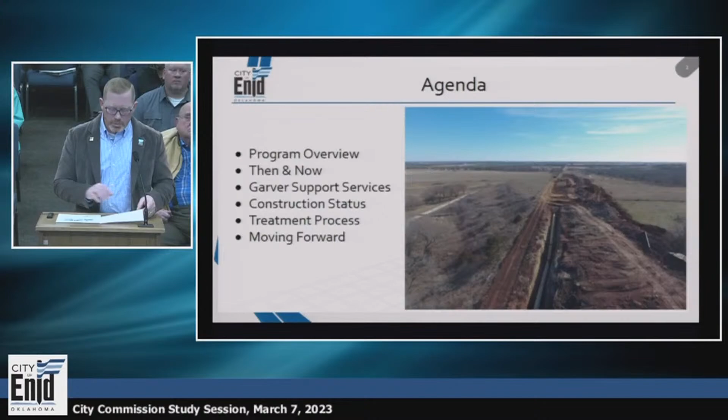So to start off here, we've got 5 major infrastructure components. First is the intake over at Kaw Lake. Most of you have probably had a chance to see that at some point over the last year - it is one remarkable engineering construction endeavor. It has a 72-inch, or 6-foot diameter, cased tunnel that extends out into the lake nearly 500 feet. The wet well off on the bank is nearly 100 feet deep and about 35 plus feet wide. That pump station, in today's design, will push 10.5 million gallons per day of water across that 70-mile pipeline. It does have capacity for future growth and expansion to pump up to 28 million gallons per day. So today it's 10.5 - add some more pumps and other infrastructure across the pipeline, and you could move up to 28 million gallons out of the intake.

The pipeline has 70 miles of pipe - 36-inch coming out of that intake pump station until it gets to US Highway 177, the north-south highway between Stillwater and Ponca City. At that location it scales down to a 30-inch pipeline for the remainder of the way to the water treatment plant on the west side of town. On that pipeline we've crossed 3 railroads, 4 horizontal directional drills under certain bodies of water, and 24 tunnels that Garney and their contractors have been installing using a hand tunneling technique - significant tunnels. For example, under I-35, Garney Construction did a 300-foot plus long hand tunnel, and that casing is installed for that pipe. There's also 8 ODOT crossings, different state and county roads that we cross as well.

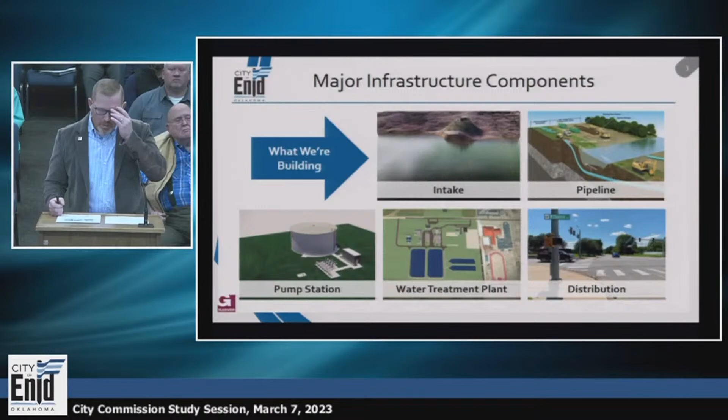Moving to the intermediate booster pump station, just north of Garber - most of that construction is nearly complete, and Jason will be able to talk you through that with some great photos. That pump station lifts the pumping capability as we go uphill from Kaw Lake to the city of Enid about 230 feet, giving it the extra force to keep pumping it all the way to the water treatment plant. It does have a 1 million gallon storage tank on site as well.

As we move to the water treatment plant on the west side of town here, so Chestnut to the far end as you go past the school, past Oakwood, and then the school, you can't miss it. The horizon has changed out there tremendously.

That water treatment plant is currently being built to provide 10.5 million gallons of potable drinking water to the citizens. It does have the future capacity to double that with additional construction. Think of it as a mirrored side to bring it up to 21 million gallons of distribution in the far future when needed.

Also another nice benefit at that water treatment plant, the new one, it'll have 20 million gallons of raw water storage right there on site, which can be treated.

So last is the distribution main you see here. There's a sign hidden up here and it says Chestnut, so that's Chestnut Avenue. A pipeline will come out of that new water treatment plant. It'll be a 30-inch, primarily ductile iron pipeline that goes about 2 3/4 of a mile to Mr. Hunter's Public Works water treatment plant. It'll tie in there to serve both the east and west distribution systems for the city. As it comes out of the water treatment plant, it'll be a blended water, part groundwater plus part raw water from Kaw Lake.

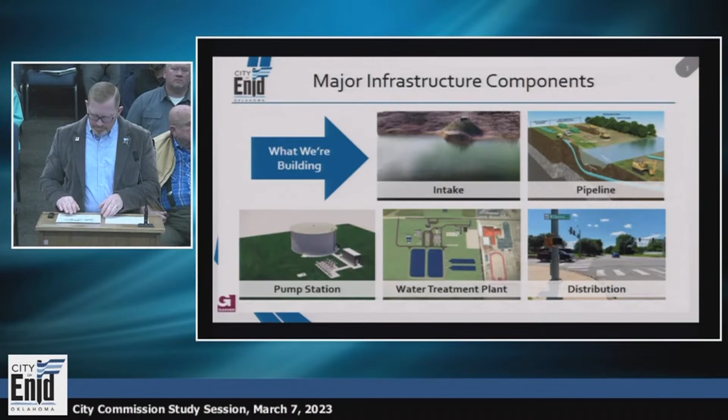Okay, so that's what. Now let's talk about where, real quick here. Difficult to see, this is crafty here. So here's Kaw Lake, here's the intake pump station, and this is Ponca City.

We then move with 8 pipeline segments from east to west, coming across the land, crossing the Salt Fork River. We get across I-35. We come to Garber and the intermediate booster pump stations right in this area. You can see we're running diagonal across the land. It is generally paralleling an existing utility corridor whereby there's an Oklahoma Gas and Electric high power overhead transmission system. They have a 30 or 100-foot easement, and we're trying to parallel that to reduce the impact certainly on the landowners across that terrain.

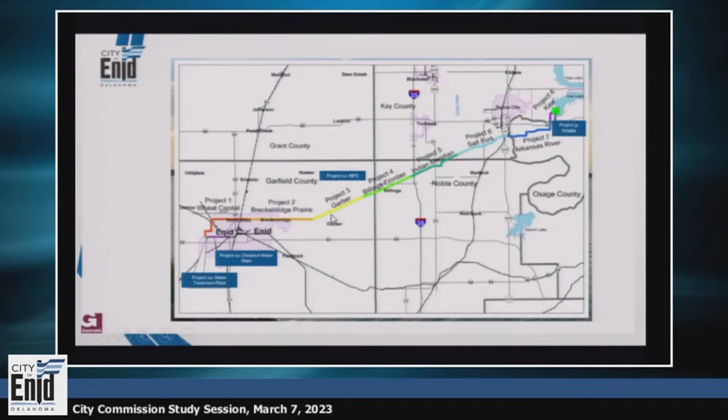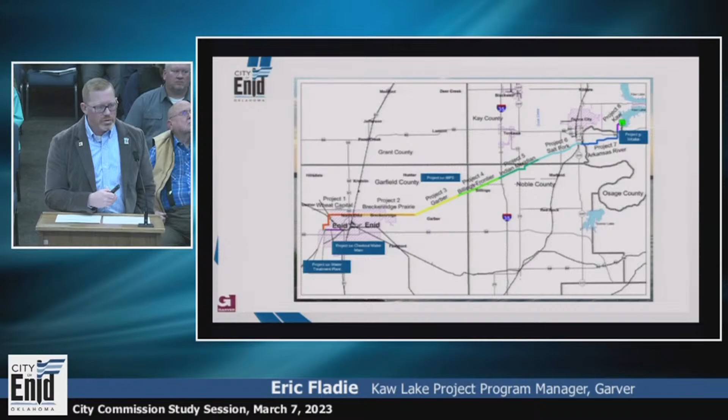When we get down here around Garber, you can see we go horizontal. So there, the pipeline picks up parallel to Phillips Avenue. It follows Phillips Avenue across the north side of the city till you hit Garland. You go south on Garland a mile, then over on Willow a mile, and then down to the new water treatment plant. So that is the 70-mile pipeline.

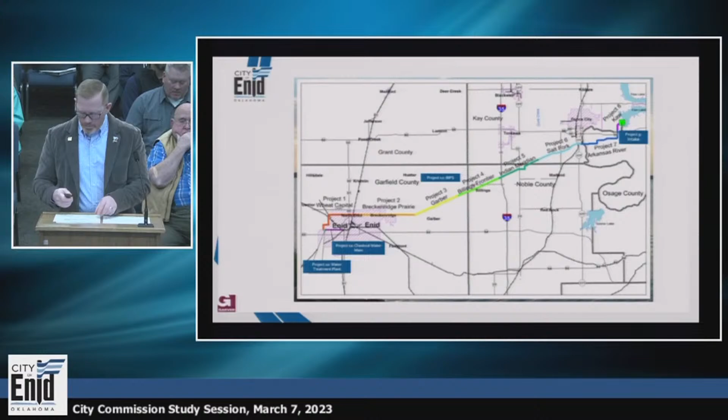And of course then you've got the water treatment plant, and the tiny little purple line is that Chestnut water main to bring the water from the new plant to Mr. Hunter's Public Works water treatment plant. Okay, so moving on, that is where. Now let's talk about where we're at overall on the program.

So you certainly can see on the far left, we've got 4 phases. Phases 1, 2, and 3 are for the most part complete, and we're heavy into phase 4, which is the construction phase, but started back in 2015, moved into our phase 2, which was preliminary design and engineering, into final design.

In this past phase, you can see highlighted here, bold still, as land acquisition. Left that up there because as we continue the work, we certainly have landowners and items there as we build this that we're going to need to continue being good stewards to, that certainly have cause for discussion and concern that we need to address. Not all things were fully completed in engineering as we obtained the original easements, and now we do have to come back to some landowners for surface features, and these primarily are air release valves that are required for the hydraulics of the system to protect that pipeline.

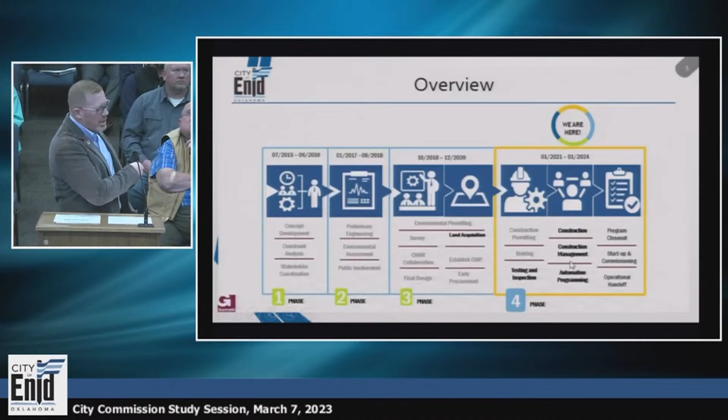So we have a few things left to do, and then over here where we're at today, we certainly have testing and inspection to support the construction operations. Garney's providing the construction management services, and the other thing we're doing in phase 4 right now is Garver has the responsibility to prepare what's called the automation programming, or in today's technological world, everything is automized or computerized. So believe it or not, the pumps all the way back at Kaw Lake and Ponca City, Mr. Hunter's going to be able to hit a touch screen on his tablet and be able to turn the pumps up, turn them down, make changes all the way back at Kaw Lake. So that automation we are providing.

Now, who's doing what? So we've got the pyramid here of the 3 partners, the City of Enid, Garver, and Garney Construction.

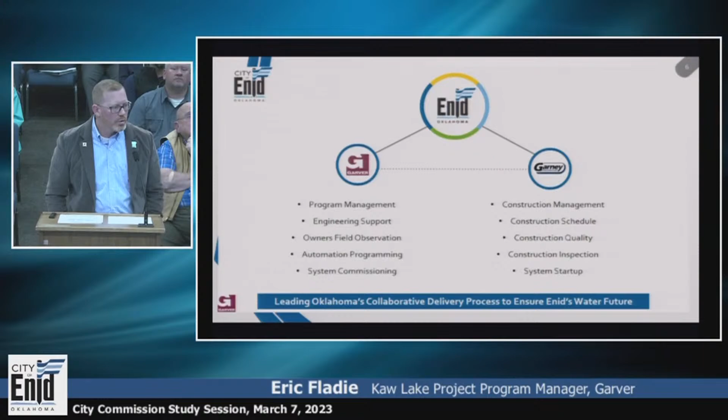On the left side, you can see 5 items that Garver is continuing to provide as the program manager at large: engineering support, even though engineering design is complete and permits are all received at this point. There certainly is, as work progresses, opportunities to improve as construction goes forward. Owner's field observation - Garver is providing, on behalf of the state as an SRF funded program, 100% oversight as owners' representatives on all those pieces of infrastructure we talked through. So we've got folks in the field when the work is happening on your behalf. We talked about the automation programming already on the last slide, but that's that computerization.

And last, system commissioning. Once the work is all ready and the water treatment plant, the entire system is ready to get fired up, once that starts happening, we're going to bring in our skilled, experienced lifetime operators that have been doing it their whole lives, and they're going to come in and provide piloting and co-piloting of that water treatment plant for 3 months to make sure that Mr. Hunter's team is absolutely ready to take the reins.

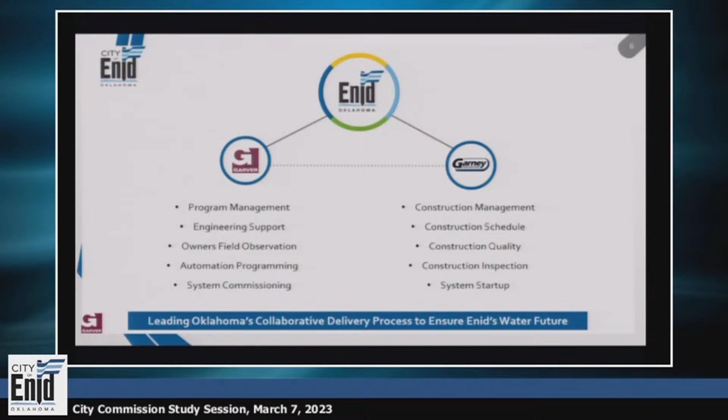Then on Garney's side, you can see they've got the construction management, the construction schedule, construction quality, construction inspection, and then system startup. So they're going to make sure all the equipment and all the facilities work properly from that mechanical standpoint for us to then integrate the automation and computerized electronical standpoint to then tune the system.

Next, quality management - two sides here. You've got Garney on the left, Garver on the right. Garney's got quality control and Garver has quality assurance. Garney's going to provide, and has been, 100% of that testing and inspection of all the work being performed across all that infrastructure. Garver's role is to provide 10% oversight - so we're checking the checker. We're there to make sure that the systems and processes Garney is executing out there to maintain quality delivery of all this work is actually being functional and moving forward in that process.

So you can see Garney does that specific stuff, and we go in and do the audits to make sure we're meeting the quality metrics.

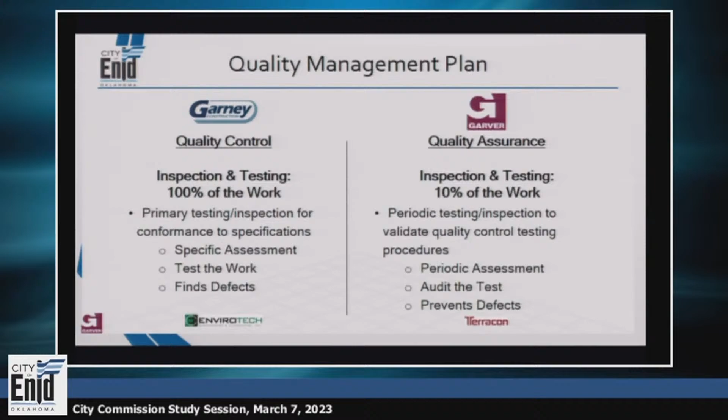On the next slide here, some of the things we look at: safety is a big one, and Jason will have good news to tell on that. Test results and inspections are paramount, of course. And of course, when there's work changes, that causes a little bit of concern and can have issues on quality while you're midstream in the middle of construction, because you have to adjust and adapt to figure out what that change is. So we try to minimize those.

On the right side of this chart, you'll see a bit of a performance chain, but think about that as being a total commitment to quality at every level. You can see you have Garney's contractor, who's the primary ones out there doing the work. Then Garney is your construction manager, and then Garver is your program manager, with our owner's representatives out in the field providing that oversight.

All right, so last time we actually visited on a total program focus of status of the program, it was back in April, so it's been nearly 10 months since our last update. So real quick, I'm going to go through then and now. When we last visited, we were dealing with some county road challenges.

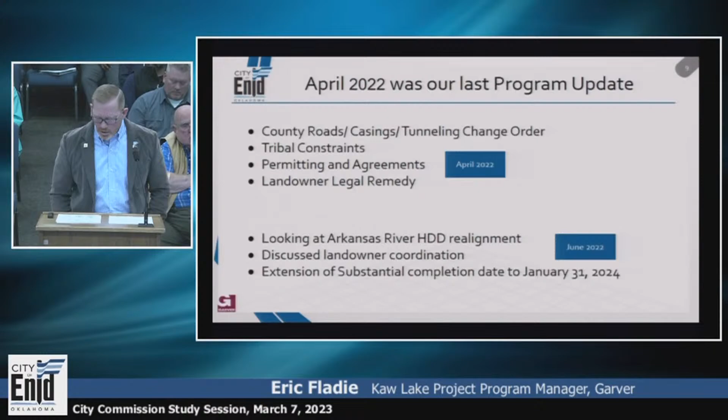We had casings and tunneling change orders due to some additional ones that were required for Garney. We worked through and resolved some tribal constraints. We had permitting and agreements to complete, to the end that, since 10 months ago, we actually have received the final storage and real estate agreement with the Corps of Engineers, fully executed. And then we had landowner actions that still needed legal remedy. So we had a lot then, and we had a lot done then.

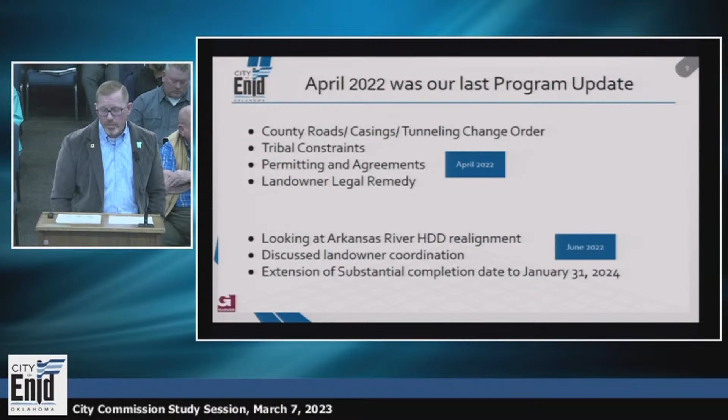Also in June, we were needing to look at an option of possibly realigning an HDD. That no longer is necessary, so they have moved forward on that work. We had coordination with landowners - we really want to maintain and reaffirm our commitment to all these various landowners out there to be good stewards to them, of their land, of their crops, of their business, of their livelihoods. And the last one there, we did an extension with Garney's contract for substantial completion. That was necessary due to the time it took to receive the ODEQ permit for the water treatment plant.

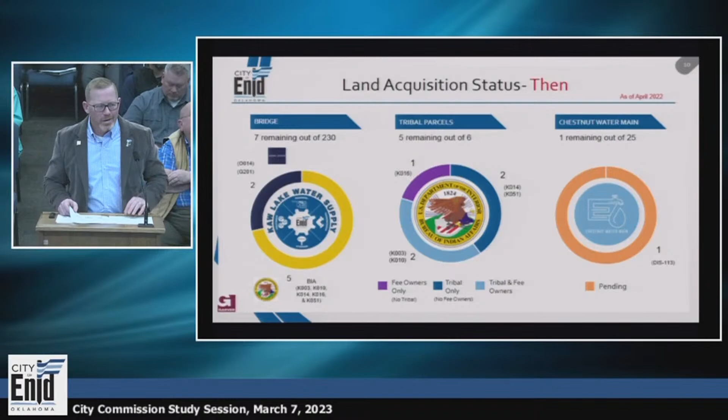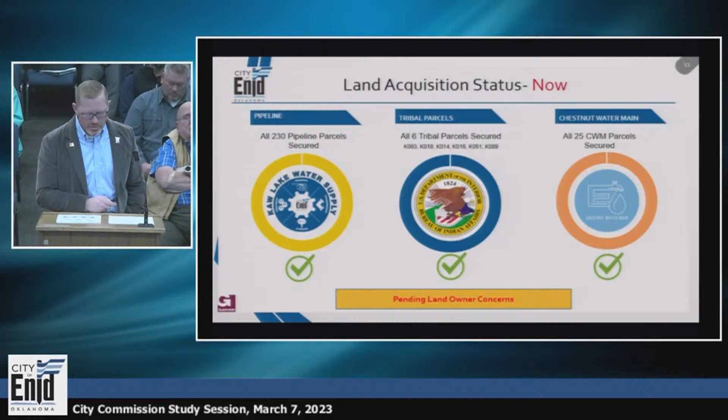So now let's pick up on these. I think you've seen these slides for nearly 2, maybe even 3 years, as of about 10 months ago. We had 7 remaining bridge or legal things to work through: 5 remaining of 6 Bureau of Indian Affairs parcels to acquire, and one parcel remaining on Chestnut Water Main. Now it's all secured. I do have a yellow banner saying pending landowner concerns, which I spoke about earlier. We have some things to finish taking care of and treating landowners right as work continues. Good news is, with everything now secured, I'm not going to show you this slide ever again.

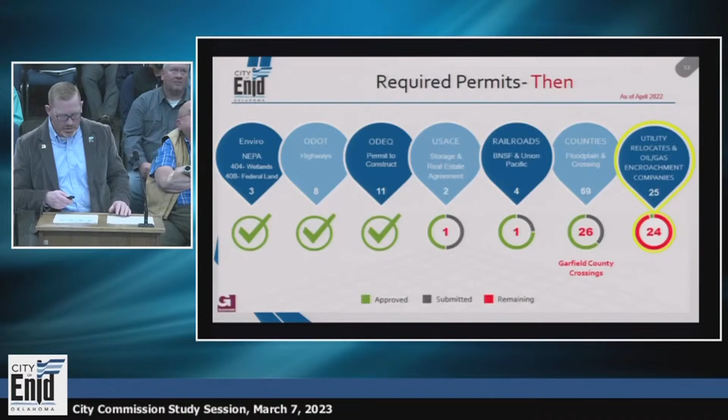Another one, this was shared for many years. We had 1 remaining, the real estate agreement with the Corps of Engineers. We had 1 railroad permit to get for Chestnut Water Main. We still had county roads to complete for Garfield County, and we had barely started the oil and gas encroachment agreements across the 70 miles. This is everything from the environmental, DOT, DEQ, and such. So now, once again, they're all secured.

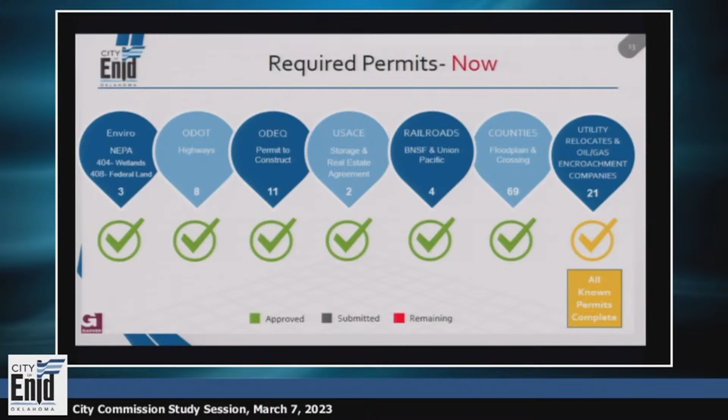Left this one yellow on the oil and gas. Right now we have 1 oil and gas company that indicated they would look for some form of agreement, but hasn't come forward with it. But putting that aside, all known permits have been completed with the oil and gas folks as Garney's crews move forward. They really don't come to talk business until you're actually ready to do that work, and they certainly do have boots on ground while Garney's doing that work to protect their own infrastructure. I'm happy to say we've had no negative reports of any manner from the work and coordination that Garney's doing for crossing the oil and gas infrastructure out there.

So you won't see those slides again either. That's it, we're done on them.

All right, construction support services. So Garver continues to provide archaeological support - whoops, I jumped a slide ahead on myself. All right, backing up here. This is work that we have served the city on over this past 10 months that I know have been very intimate with all of us here.

County road permitting, bald eagle mitigation support - we did get a permit that allows us to provide monitoring so Garney can continue working and make sure we're not disturbing the eagles. There's one nest within the work zone, and we've gotten to watch the eagles. Every time I go out there, I see them. They're nesting right now, and I'm sure they have eggs at this point. So magnificent to watch out there.

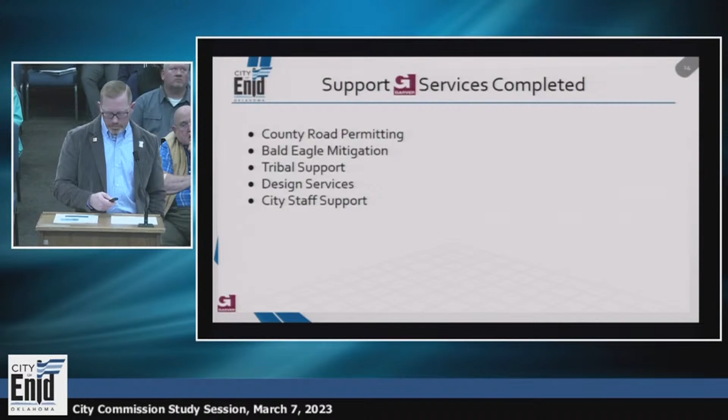Continuing on, archaeological impacts - we still have monitoring out there for archaeological finds, it could be anything from a flint stone, an arrowhead, to pottery, to certainly a potential for burial sites that you've got to look at. So we look out for that. The tribes have people out there, and we have people out there at those sensitive areas monitoring as the work happens and occurs. Landowner impacts is constant and daily.

So I'm about to hand it off to Jason to dazzle you with a lot of good photos. What I want to show here is we had two-dimensional, a piece of paper design - I guess this one's in a, whoops, three-dimensional format here. And you can actually see this intake header now, the actual reality of that work. So you're looking at one image on paper and the real-life image in real time. So with that, Jason.

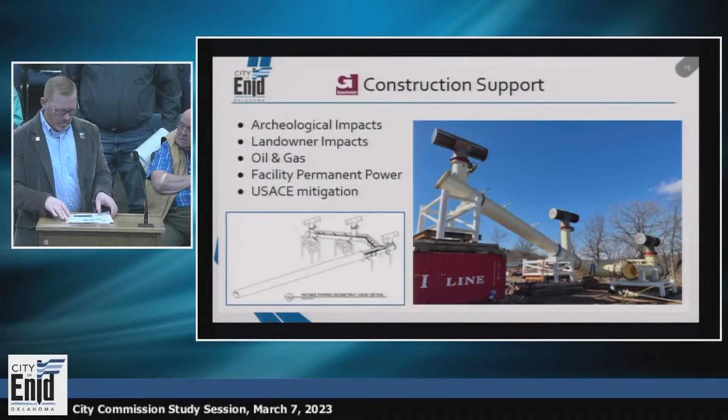That one. I guess before I get started, many of us pride ourselves on being forward thinkers, looking to the future. If there's a message I could leave anybody here with tonight as we go through these photos, I'd ask everyone to reminisce and look back a little bit.

There have been many past, present, and future individuals and teams responsible for forward-thinking delivery of programs of this magnitude. If we take a moment, we've had a series of events, whether the groundbreaking at the water treatment plant, the commissioning tours along the pipeline alignment, the TBM launch party at the intake, or a few trips along Phillips Road. As we go through these photos, I'd ask each of us to reflect back and think about the hurdles and challenges incurred along the way. Programs of this magnitude aren't possible, they don't happen by accident. There will always be a few bumps in the road, but with the collaboration of the CMAR delivery approach, the end is in sight of delivering a program of this scale and magnitude. So with that, I'll move into the photos and some program and progress updates.

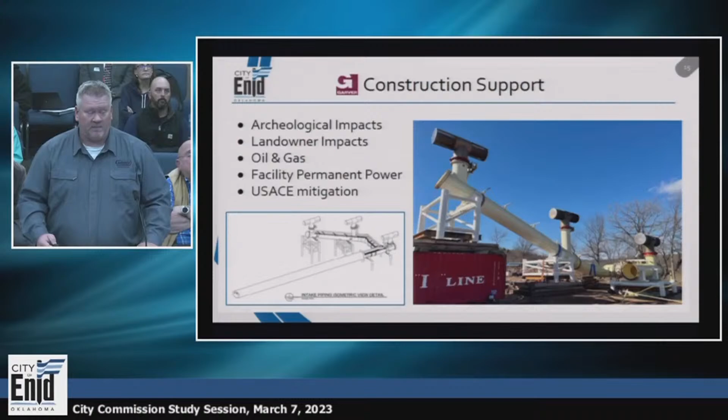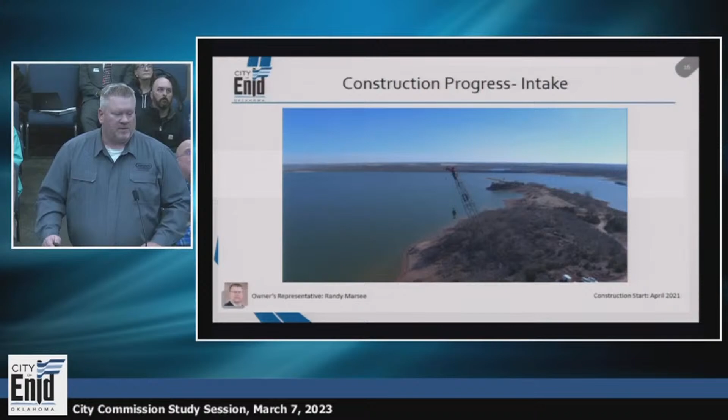Zooming down a little closer, back to the TBM launch party, and there are some other pictures we'll get into related to the intake shaft. This is where the program actually originates and starts, the Kaw Lake intake, before it transmits 70 miles onto the city of Enid on the western side of the water treatment plant.

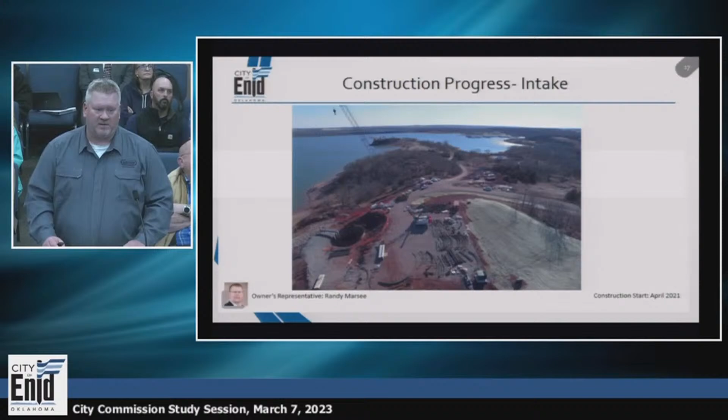Eric had a prior photo of some of the marine efforts that are ongoing. This is a 3-tiered intake header assembly. There was a lot of extensive site mock-up effort to make sure the parts and pieces of this elaborate puzzle fit and went together properly. Those efforts were in advance of the placement underwater, currently projected around March, but likely April this year, presuming ideal weather conditions. The lake level is a little low, posing some constraints with the barge, etc.

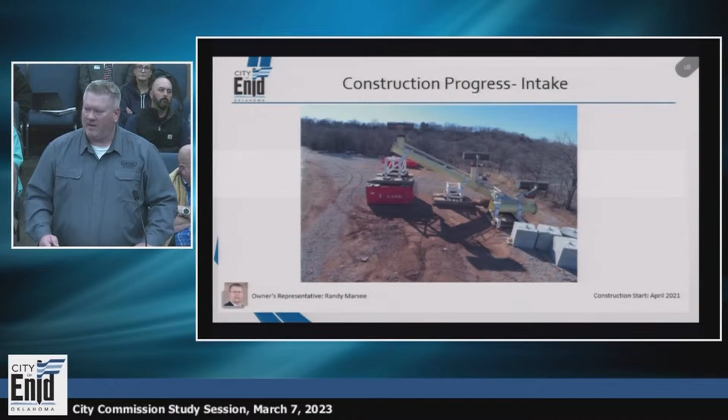If you haven't been out in the area, you're nearing limited time and availability to actually see this structure before it's placed underwater.

Another aerial looking back towards Hideaway Marina, where this structure is staged. To the left of that photo is the barge and crane assembly that will eventually be towed out back into Kaw Lake to facilitate the remaining scope of the marine activity. They'll tie this header pipe into the previously constructed microtunnel that extended roughly 500 feet out of the intake shaft into Kaw Lake.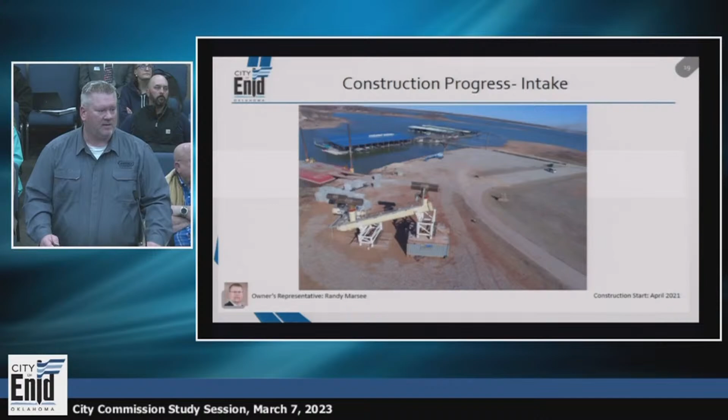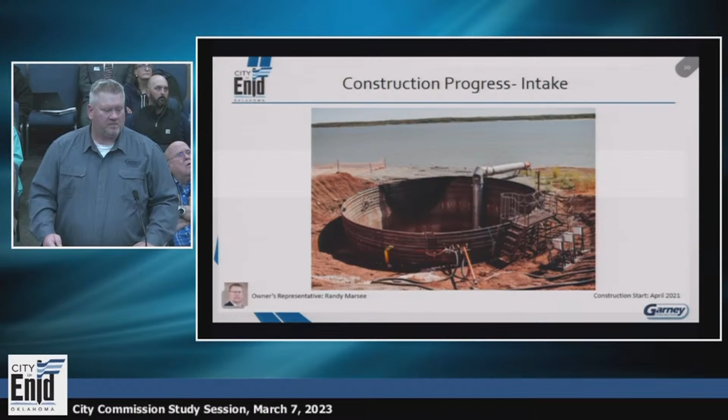Closer up, probably a familiar location from the prior TBM launch parties, this is a view looking down at the intake shaft. Again, on projects of this magnitude there are always a few bumps and hurdles. Crews are working tirelessly to fight some infiltration of groundwater, but that's to be expected to an extent within a 100 vertical foot descent downward through fractured rock and limestone. This photo is a little dated, but the first lift of concrete is up to the bottom of the pump cans. Moving forward, that concrete placement will continue vertically throughout the shaft up towards the final lift at the top of the wet well structure.

Just a panoramic view looking across Kaw Lake back towards the intake header assembly, and a closer up photo of that intake, with some prior conversations related to the stainless steel burst piping and the valve operating strapped to that intake header assembly.

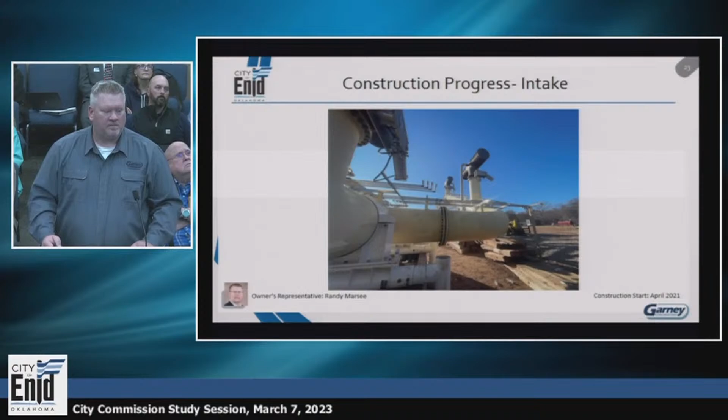This is probably a little bit... As you go through it, would you include the percentages you gave us yesterday in a meeting for each of these major components? Yes, sir, percentage complete. And if you don't mind, when I get to the end I've got a high-level summary slide to capture those percentages. Okay.

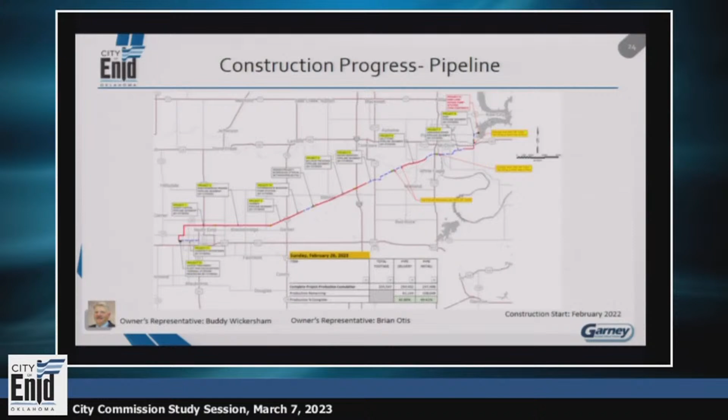This is a little difficult to read, but essentially the red is the already constructed pipeline, moving from Enid segments 1 through 3. Currently we have crews working in the tail end of segment 5, a portion of segment 6, segment 7, and segment 8. From a high-level summary of the totality of that pipeline, approximately 70% is installed through close of February, and roughly 80% of the pipe is delivered and staged. Over the next 2 to 3 months we should have 100% of the pipe delivered, and hopefully by summer the totality of the pipeline is in the ground and installed.

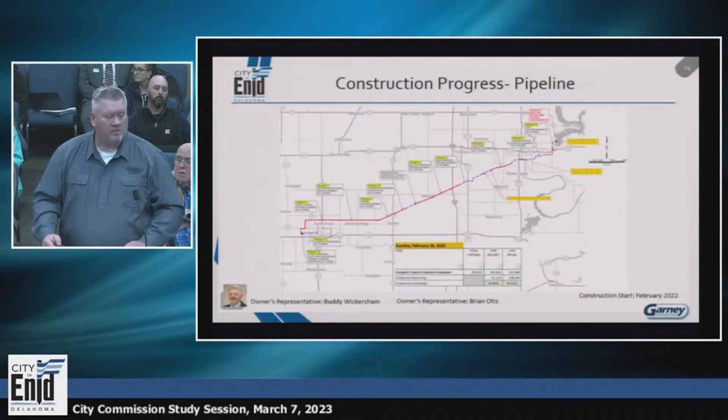This is a high-level percentage of the pipelines. I won't focus too much on the percentages, this pertains to right-of-way preparations, but the primary factor is actually what's installed and delivered, again roughly the 70 and 83 percent.

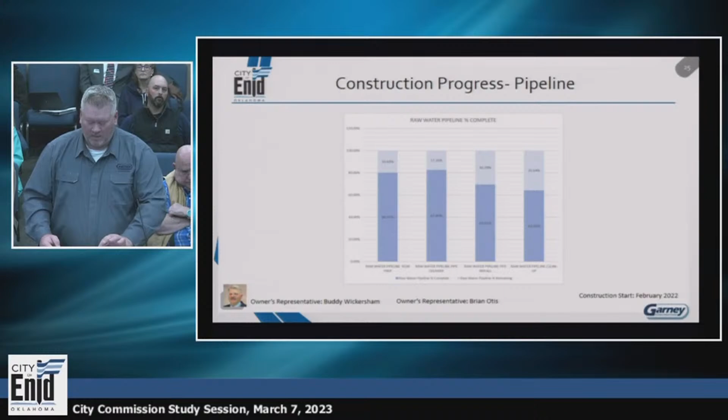I wanted to reflect on this a moment. Although the directives weren't needed, I fully appreciate them because it's what we do. Eric had alluded to property owners being stakeholders, so one of the asks Garney was given throughout management of this program was to be responsible stewards of the property owners.

I know we've all seen this, but this is an example of some of the preparatory works that lead into startup pipe staging and part of startup pipe installation. It's stripping and segregation of the topsoil along the edge of the right-of-way so that when we complete construction, we can return the property hopefully as good or better than before it started.

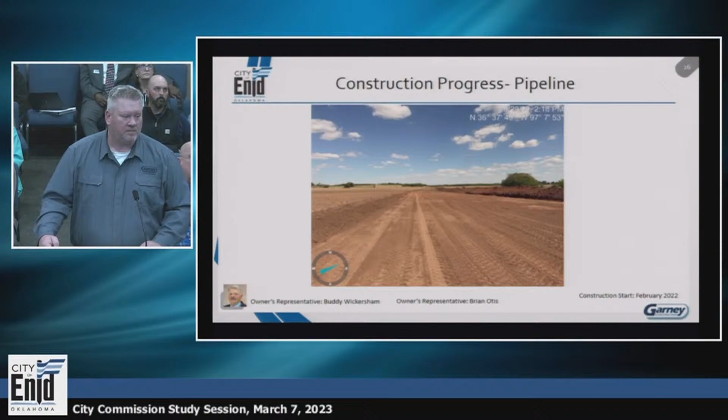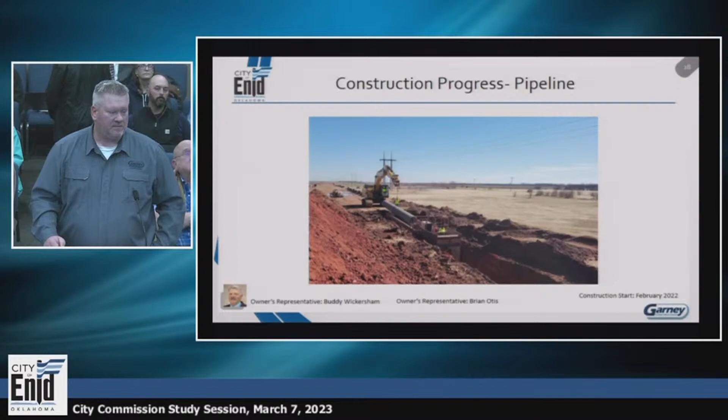The next phase, after the right-of-way was prepped, pipelines were staged. Now we move into the exciting part. This is some of the open cut 30-inch concrete bar wrap installation. Closer view, 30-inch section of a C303 bar wrap pipe within a trench box.

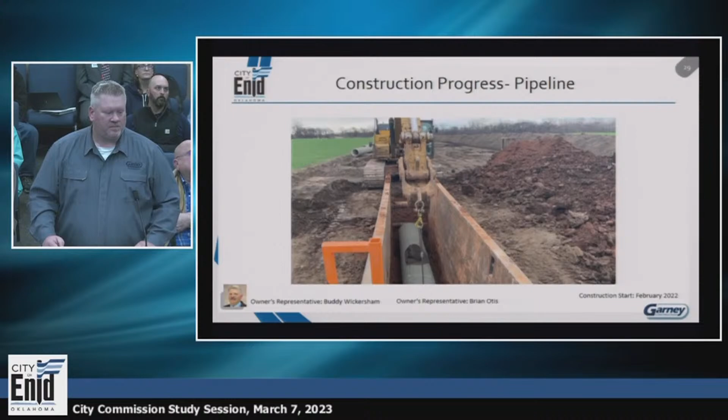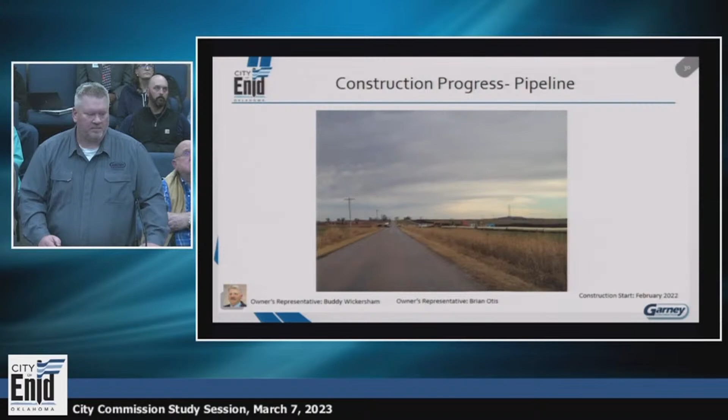This is an overview within segment 7. This was leading into our construction progress. This is a photo of some 36-inch steel pipe staged on the right-of-way. It's on the east side of Ponca.

Back to the stakeholder comment. This is an example of some of the restoration efforts that went into the program in an attempt to try to return the right-of-way to condition of like or better prior to start of construction. In a near perfect world, when this project's fully constructed and fully restored, other than some pipeline appurtenances, pipeline markers, cathodic protection boxes, air release valves, or blow off, hopefully you can never tell we were here.

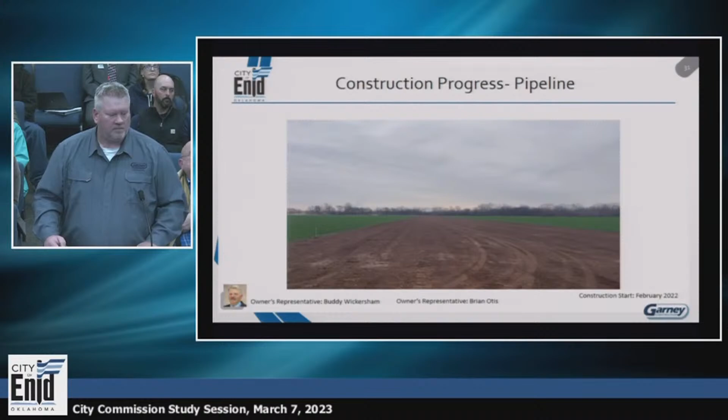A quick update on the tunnels. 22 of the 24 tunnels are complete. We only have 2 remaining. Looking for a scheduled return yet this spring, and by early summer, the 2 remaining tunnels are to be constructed.

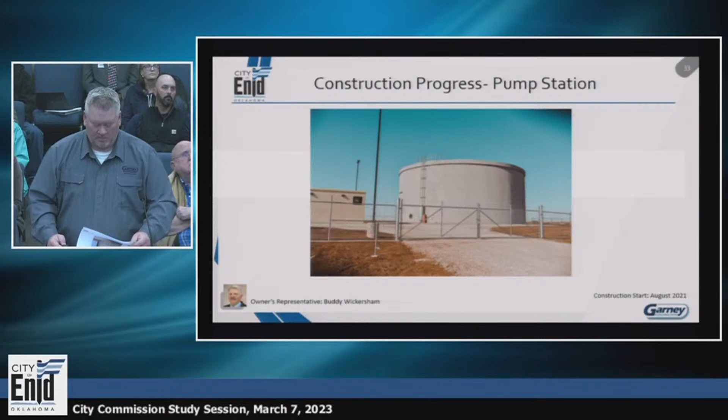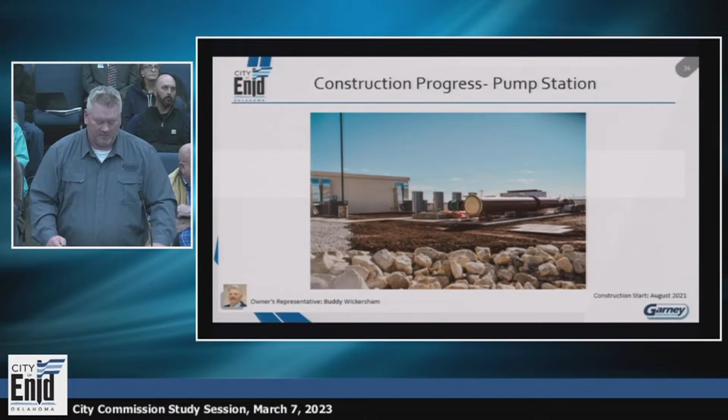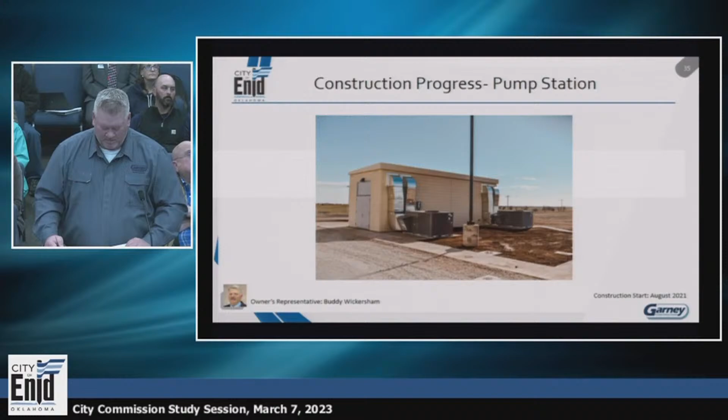Moving from the pipelines to the intermediate booster pump station near Garber. This is a photo of the 1 million gallon storage tank. Within the intermediate booster pump station, just a quick photo of the header pipe assembly as well as electrical building. Closer up with electrical building and the HVAC system. Just a general overview of that site.

There's an overflow drainage structure in the event that there's a water surge or demand, so it doesn't overpressurize the tank. There's a means to evacuate that excess water.

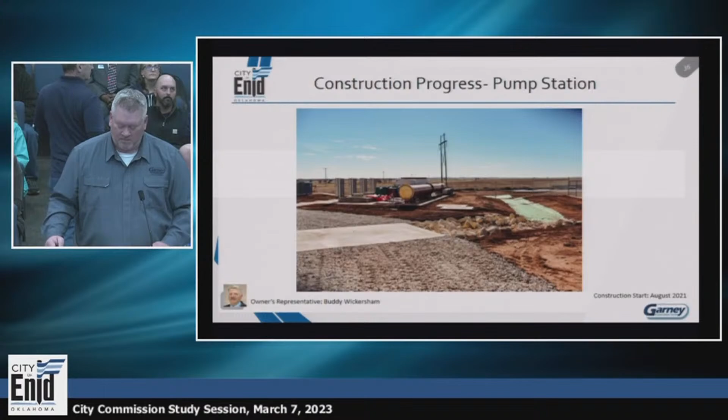Leaving the intermediate booster pump station at the water treatment plant here on the west side of Enid off of Chestnut. Things considerably look different today. It's evidence on site that construction's going vertical. It's far beyond the days of the original groundbreaking.

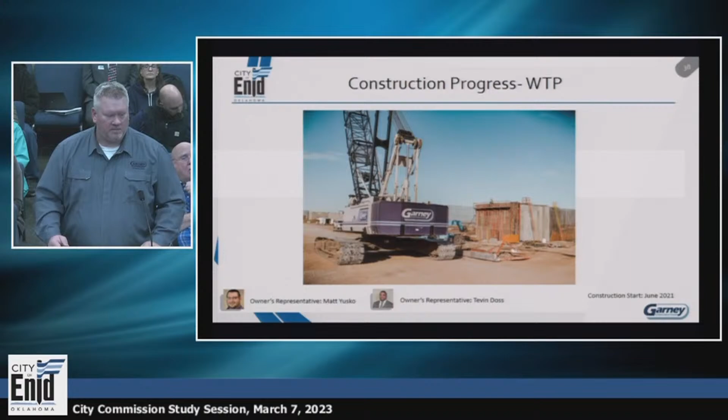Moving into some of the progress photos at the water treatment plant. This is the GAC, or Granular Activated Carbon Facility. Again, vertical construction. This is a quick view of the blended water facility, just to kind of gain perspective of the manpower that you can see looking through the rebar cage and the vertical ascent in the background.

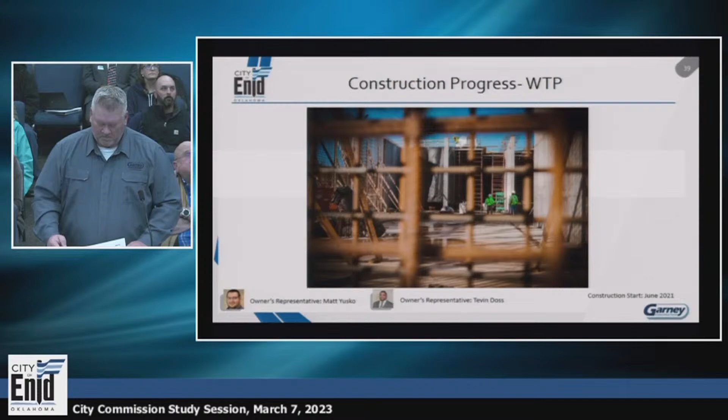This is a depiction of the filter building and pipe gallery. On the right side of that, initially the program scheduled for 10.5 million gallons. On the right side of that are the provisions for a future, or simply a mirror expansion.

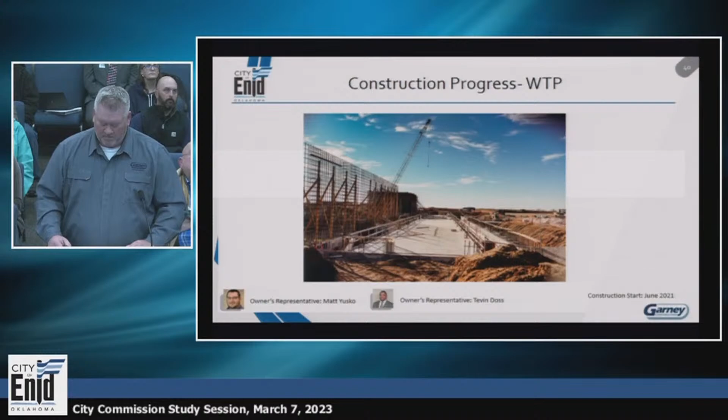Another photo of the granular activated carbon facility. I'll share a quick percentage before we get into the high level. At the water treatment plant, roughly 50% from a construction standpoint. At the intermediate booster pump station, to go backwards, probably north of 95% from construction. There remains some electrical and SCADA work, so when you see the facility high-level summary, that percentage is going to appear to be lower.

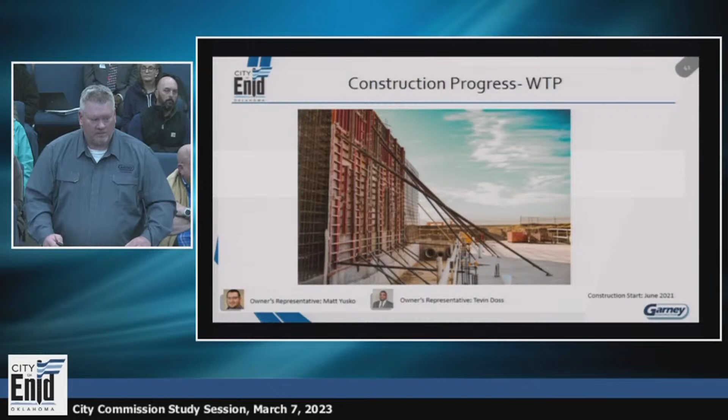From a high level percent completion by the 5 facilities to date, roughly 61% complete cost of work. Breaking it down into the water treatment plant, right at the 50% that I'd mentioned previously. The raw water intake, currently at 57%.

Again, ongoing work at the water treatment plant, tremendous amount of concrete, rebar placement, ongoing multiple structures. At the raw water intake structure, crews are actively working inside the shaft, working on that wet well construction. Once that finalizes, the crews will work on the structural and shell, the mechanical outside of that. Concurrent with late this spring, the marine crews will return to finalize the intake header assembly within Kaw Lake.

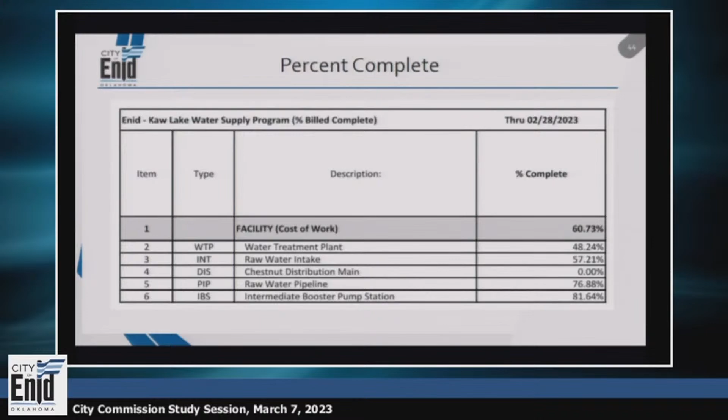Before I move on, any questions of any of the 5 facilities and where status is with construction today?

That station out by Garber, in relationship to Garber, where is it directionally? North, about 2.5 miles north of a main county road. There's a north-south highway there, the hard paved one out of the gas station. From there, 2.5 miles north, take a right and go 1.5 miles down a county road. As soon as you hang that right and head up the hill, look left on the horizon and you'll see it out there. So 1.5 miles down and look left, you can't miss it. We can certainly send you a map if you'd like.

Any other questions? Rob, did you get what you needed? That's what I wanted to see right there. Okay, good. Yep, thank you.

Thank you. Oh, before you leave, when are we going to be done? He threw up a date that I don't think's accurate. Administratively, we're still in discussion on that. That was a date we're currently under contract for today. Think you'll be done then? Probably not. That's what I wanted to hear. I don't want to mislead anybody. The date he put up there is probably not the end date, it's not.

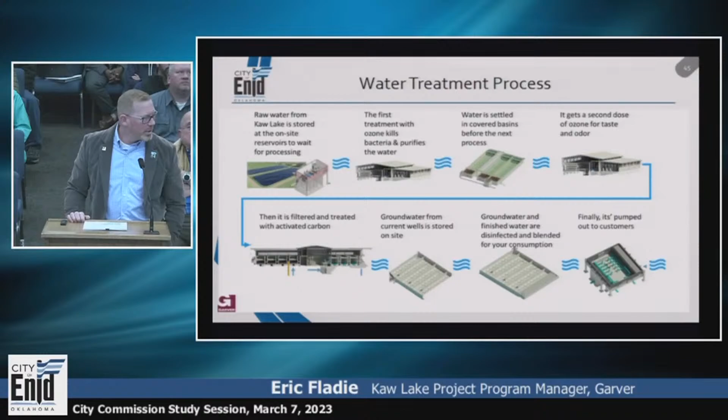To close us out here, Jason talked a lot about the water treatment plant, and you can see that's some pretty serious industrial construction work happening. That's what we ultimately call the treatment train, and this is a flow chart I wanted to share to simply talk through the process of how that water is ultimately treated.

It starts at the top left with our 2 terminal storage reservoirs that provide 20 million gallons of on-site raw water out of Kaw Lake. It gets pumped by a pump station to start passing through the treatment train.

The first step is a process of ozonization to kill bacteria and purify the water. Next it goes into settling basins to pull away solid contaminants. At the bottom, it then moves through a second dosing of the ozone.

From there, it moves to what's called granular activated carbon, similar to the refrigerator filter you have and swap out once a year, or a carbon filter for tap water. Think of that exact same aspect at a macro scale here for this water.

From then, it goes to a storage tank, where it gets blended from one storage tank to another with the current ground well water that the city of Enid has been accustomed to for the life of the community. At that point, the ground well and surface water get blended.

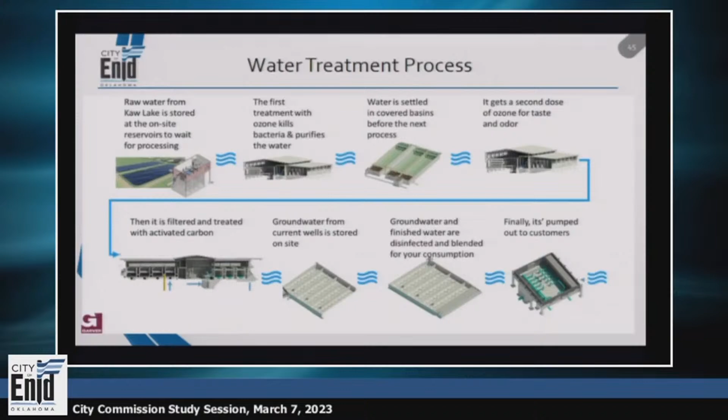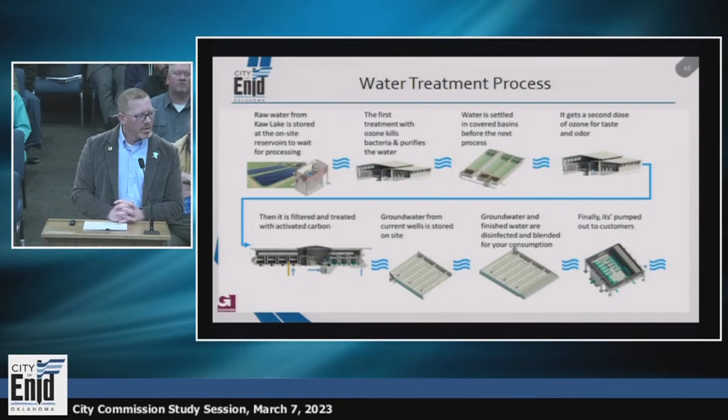We're aiming to match taste and odor, and with those two different surface and groundwaters being mixed and going through this treatment process, I think the community's going to be in great shape for long-sustaining, generational water quality and redundancy beyond our lifetime. From there, it gets pumped out into the city through that Chestnut water main.

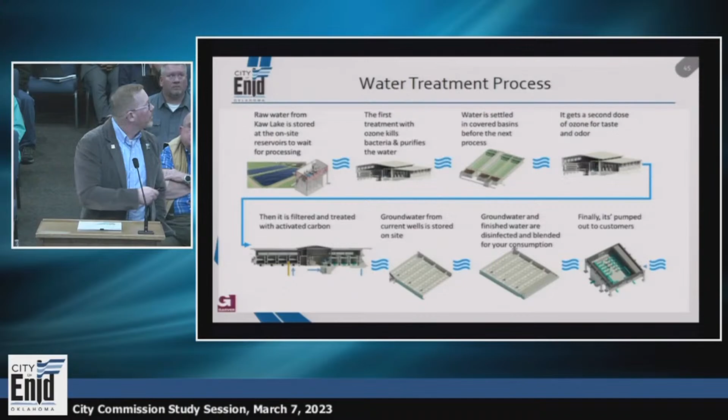I think this is the first time I've actually seen a flow chart. Sorry, flow chart. We'll give Commissioner Stallings credit for making the request here.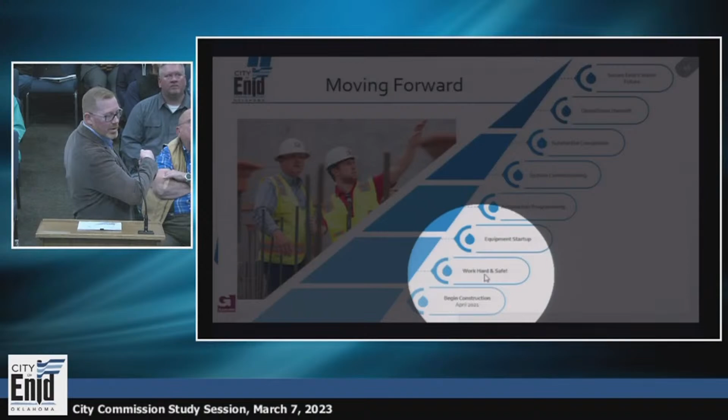The next one here is work hard and safe, so that's Garney's goal at this point, as we keep doing this hard work and being safe about it. You can see from the photos that the structural work is being completed. We're coming close to getting all the equipment on hand to where they'll start installing many different components across all the various infrastructures.

Once that equipment's installed along with the electrical component packages, we're going to start bringing in that automation programming system with it. From there, we'll do that system commissioning, so Garney will make sure all that equipment works properly, do a functions check on all of it, and integrate the electrical or computerized programming components.

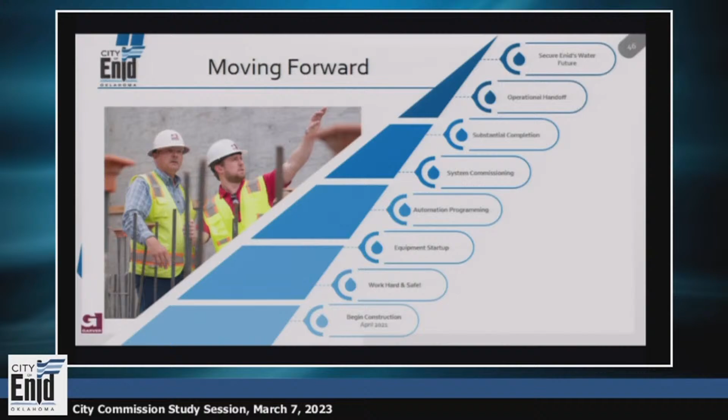Then we get to start doing that holistic commissioning or tuning, all the way back to the pumps that are like a straw sucking water out of Kaw Lake to move it all the way to that very simple treatment process I just showed you, which is actually quite complex when it's all said and done. That'll be that system commissioning.

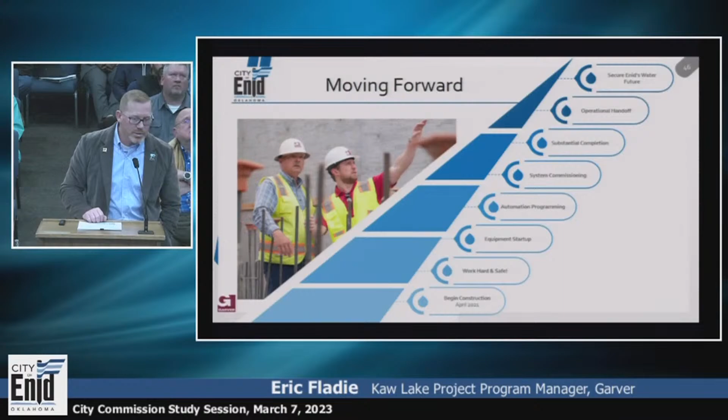At that point, we have substantial completion, and that's when we'll start doing an operational handoff with David Hunter's operations staff and do that piloting, co-piloting to be able to turn it over to the city for securing your long-term future and water resources.

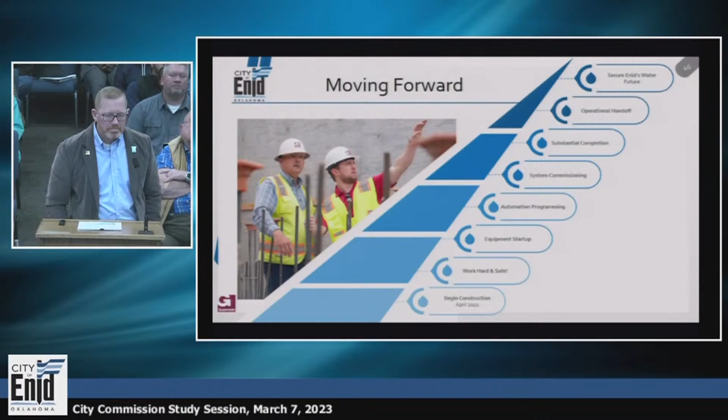With that, are there any questions? No? Okay, thanks, appreciate it.

It's a great update. It's looking good and we're getting excited, so thank you. Wonderful, thank you.

All right, next up, item 3.4, discussion on the process. Oh, I'm sorry, 3.3, Kaw Lake Water Supply Program Financial Update. Sorry, Erin, wouldn't want to leave you out. That's why I got this other, okay.

You're good, Commissioner. So back in December, I gave you an update through the end of November, so we're just going to hit the highlights of what's happened over the last 3 months with the program financially, so you guys are up to date on that.

This is the total of how all of that money that has been brought in has been spent on the sales tax. This pie has grown by $2.79 million over the last 3 months. We've brought in $2.731 million in collections, and then we've added an additional $59,000 in interest that we've earned over that 3-month period as well on those funds.

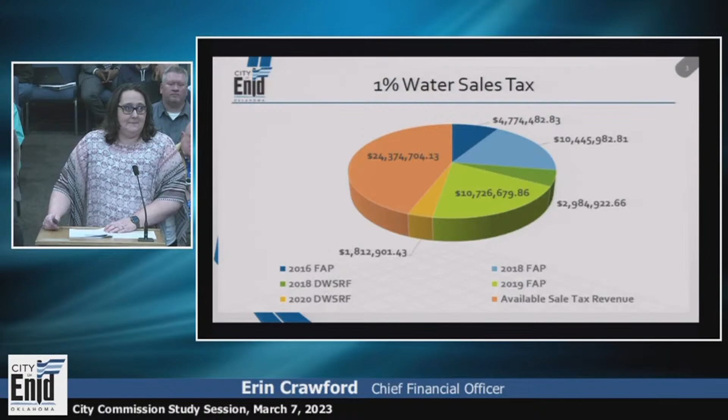We do have one note maturing on the T-bills at the end of this month, and we'll update the cash flow forecast and see what we need to do as far as reinvesting and what's available with our new payments that are coming due within the next year.

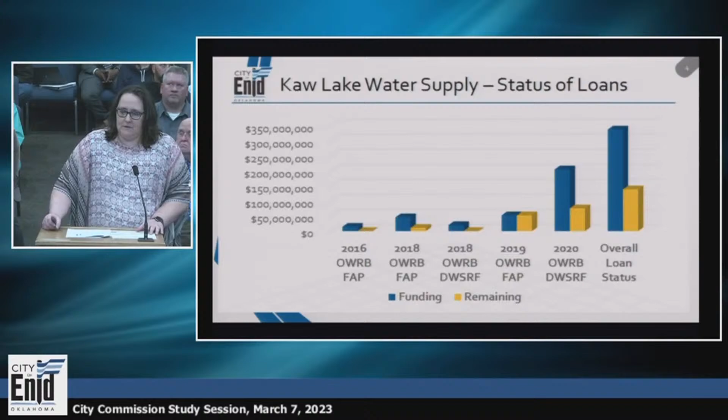This is the status of the current loans related to the Kaw Lake Supply. Again, the FAP loans from 2016 and the SRF loans from 2018 are fully drawn. At this time, the FAP loan from 2018 is 77% of the way drawn down. There's $10 million left in that account. The 2019 FAP has still not been drawn at this point, and the 2020 SRF has been 63% drawn down.

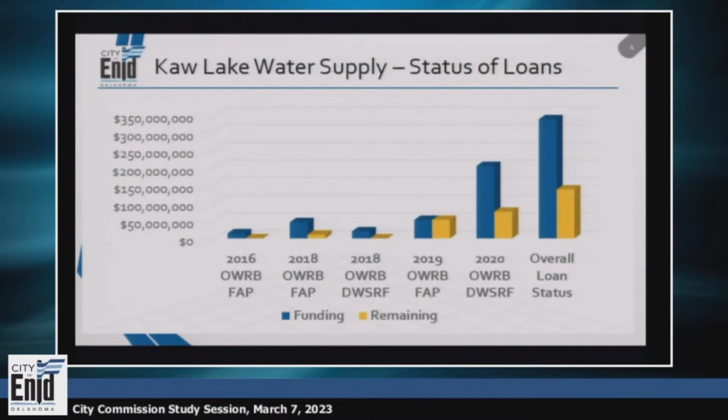Overall in the program, we have added interest for the last 3 months of $600,000 from those FAP loans sitting there in interest, and we've drawn down $28.7 million in payments out to contractors on the program in the last 3 months. Overall, we have drawn down 59% of the funds in loans related to the program.

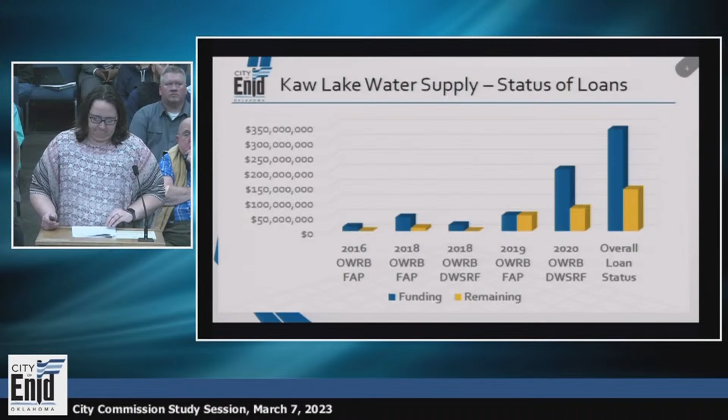And again, this slide has not changed since last time. It's exactly the same. We have not made any more loan payments, so everything sits as it was 3 months ago.

And then the last slide here is just a budget status update. Again, still the same.

Of the $131 million that's encumbered, we have approximately $10 million left on our contract with Garver, $119 million left to pay on the Garney contract, and then the rest of the $3 million makes up tribal and county agreements, environmental, and some other landowner things we already have earmarked in the program.

Are there any questions on the finances that I can answer for you? No. Okay, thanks. Thank you, Erin. Yep.

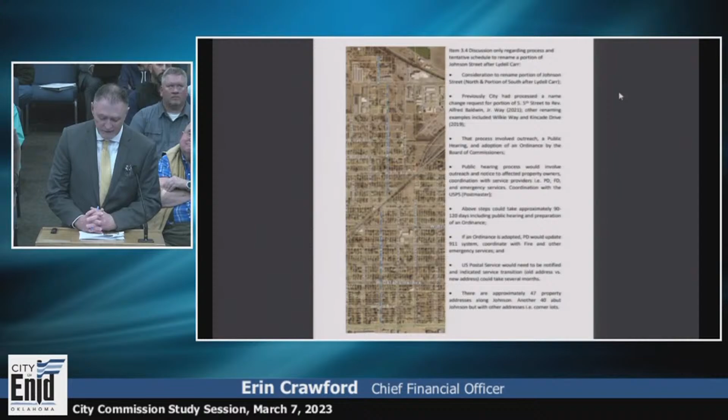Typically, the process, at least the last process, involved public outreach, a public hearing similar to what you do with a rezoning effort, and adoption of an ordinance by the Board of Commissioners. The public hearing process would involve outreach and notice to the affected property owners. We estimate that to be about 47 addresses along Johnson as it stands now. There are another 40 lots that abut Johnson but may be addressed differently, like corner lots. So that gives you an idea of the scope and magnitude of outreach.

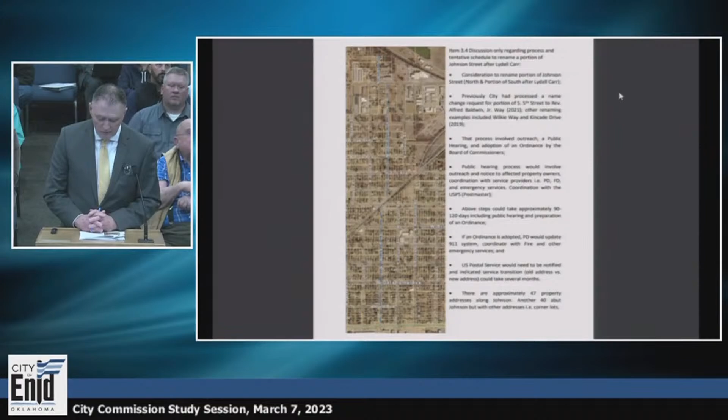It would be noticed to affected property owners, with coordination with our service providers, our police department, our fire department, and emergency services, as well as coordination with the Postal Service, USPS, the postmaster, who we did reach out to today to figure out what that looks like. It's estimated these steps would take about 90 to 120 days, including outreach, a public hearing or two, if that's what the commission desires, in preparation of an ordinance for your adoption in the future.

If an ordinance is adopted, our police and fire, 911 system, and other emergency services will assist in setting those new addresses up so that we're up to date. The Postal Service has indicated we would notify them if the ordinance is adopted, if that's the direction, and that the transition from old to new addresses could take a few months.

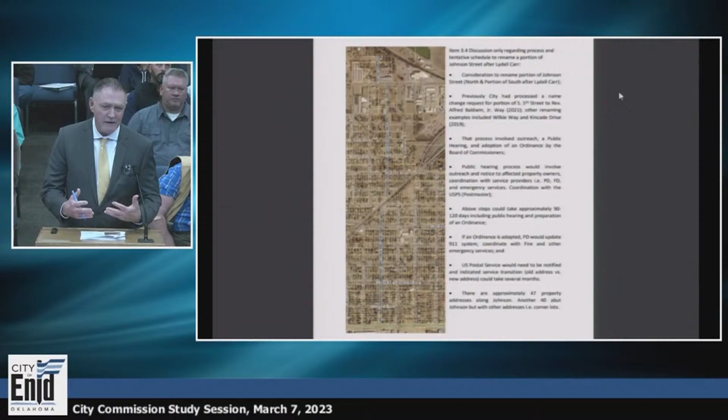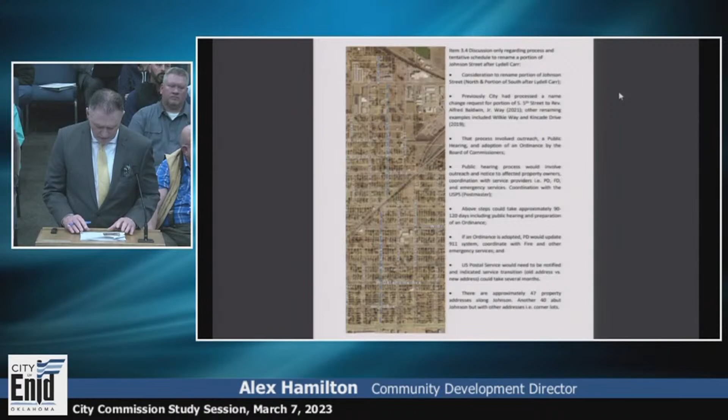That's all we have at this point in time. So think of it as a point in time, could be several months, where mail to the old addresses will still be delivered, and at some point there'll be a cutoff, but we'll certainly coordinate with the community on that. This concludes my presentation. As I said, it's for information only, just to give you an idea of the tentative process and next steps and schedule should direction be received to proceed.

Okay. The only question, if somebody had an address, just using a hypothetical number, 45 Johnson Street, would it now be 45 Lydell Carr? Would the 45 stay the same, or does the whole thing change? That's a very good question, Mayor.

That would be the intent, but our code section is the one that assigns the addresses. And of course, we'll work very closely with the police and fire to do that. We'll try and keep it as consistent as possible. We may not be able to, but we'll do our best, because the name change in and of itself is enough of a change, but if the numbers change too, it could throw everything into disarray, so we'll do what we can.

So we're talking about 45 homes that would have to reconfigure their address based on your number. The other lots, we're not too worried about, since probably mail isn't delivered to a lot. Well, it's about 47 current addresses that take their address off Johnson. The other 40 or so are addressed differently—they could be corner lots. There's about 8 vacant lots along Johnson, give or take a couple, that may get new addresses if and when they get built out. So that's the order of magnitude.